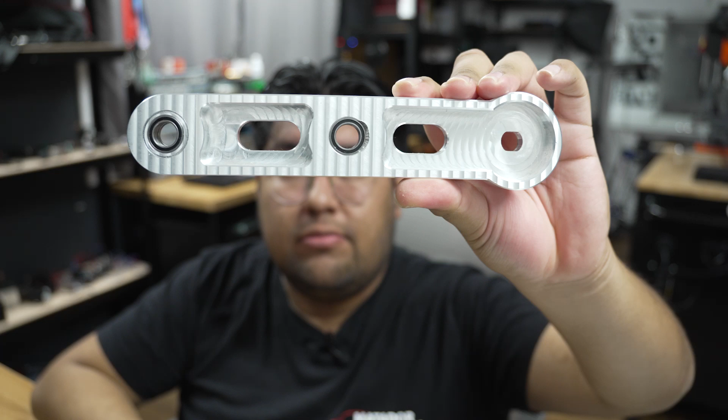This here is a part I made on my CNC mill. In this video, we will discuss everything you need to know in order to start machining your own parts.

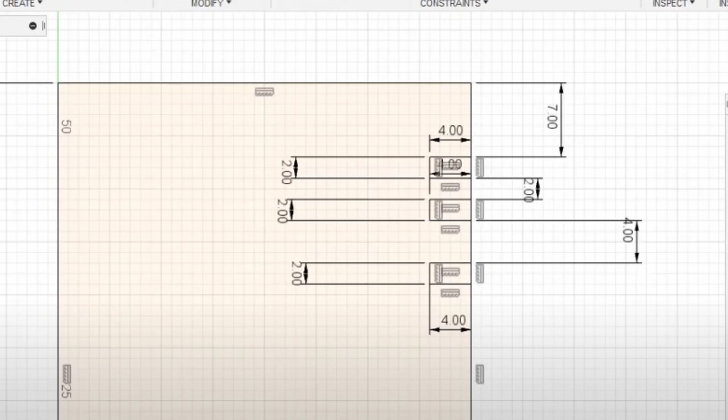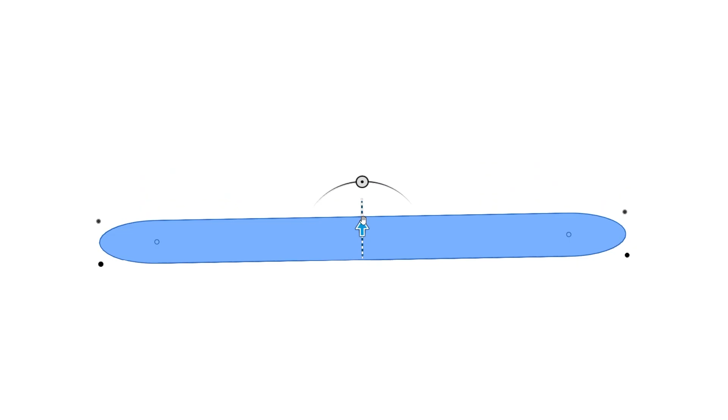Before any machining can begin, I first have to design my part, and that process typically starts in a CAD program. At its core, CAD revolves around two primary actions: extrusion and subtraction. I'll begin by sketching the basic outline of the part I want to create. Once the sketch is complete, I extrude it, transforming the 2D drawing into a 3D object. From there, I can add additional sketches on any surface and subtract material to carve out the exact shape I need.

Before you machine something, especially an assembly part, it is important to validate the design. In my case, a quick 3D printed prototype can help me gauge if my design has any apparent flaws.

Now that I know my design doesn't have any obvious flaws, it's time to start milling.

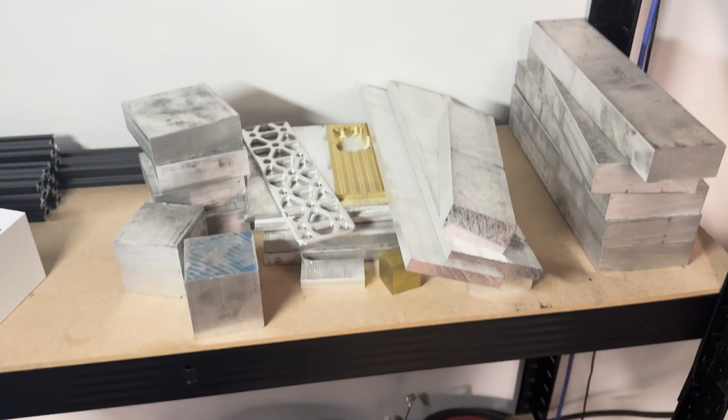In most cases, the stock material comes in either a rectangular or cylindrical shape and must always be larger than the part you're machining. Here is my stock. The nominal dimensions are 10 inches by 2 inches by 1 inch. I say nominal because when I actually measure the part, it isn't exactly those measurements. As you can see, instead of the advertised 1 inch, it's closer to 1.0125 inch.

The discrepancy between the vendor reported and actual dimensions occurs because the stock isn't manufactured to be perfect. It's just close enough. Since it's going to be machined out anyway, stock is produced quickly and cost effectively.

Okay, we now know that when we buy our stock, the dimensions might be all over the place, so why is that important? It's important because when we place our stock inside our mill, it causes things to be unaligned. And if we're programming something expecting our stock to be exactly how we have it in our CAD, that creates some issues because they don't line up. This can result in a part that is slightly crooked.

In order to solve this issue, we do something called facing. Facing is a process where we cut a slight layer off the top face, and that flat face we use as a reference.

Before I can start explaining what facing is exactly and referencing our stock, I need to first explain workholding, or more specifically, my vise. This is a vise. Essentially, it's a large, heavy, and precise clamp.

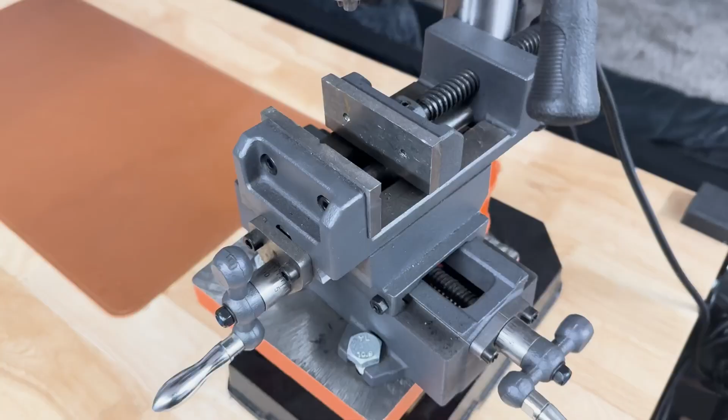Initially, I thought I could save money by using an old cheap vise I had, but quickly realized that was a bad idea. For reference, my old vise maybe cost me $60, but this one here costs around $400 to $500, which is crazy and a little annoying.

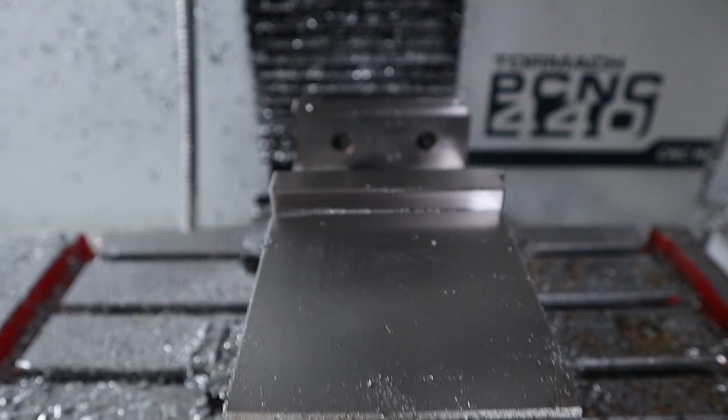A milling vise is different from a standard vise in two key ways. First, when it clamps on an object, it pushes down rather than up, ensuring the part stays securely in place. Second, a milling vise can be used to reference an axis. By this I mean that when I place a part here, I can be certain that one edge is parallel to the x-axis of my machine.

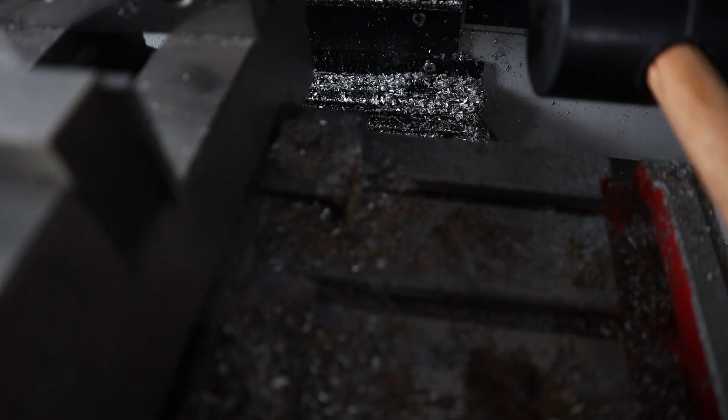To make sure the vise is perfectly aligned with the x-axis, I use these 4 clamping points. By lining things up and then using this edge finder, I can tap in the final fine-tuning of the position. Once the vise is leveled, I can secure my stock. And once I level the vise, in most cases, I don't really have to touch it for quite a while.

But if you notice something, the depth of the vise is more than my part. So when I place it inside, it just falls through. And that is an issue.

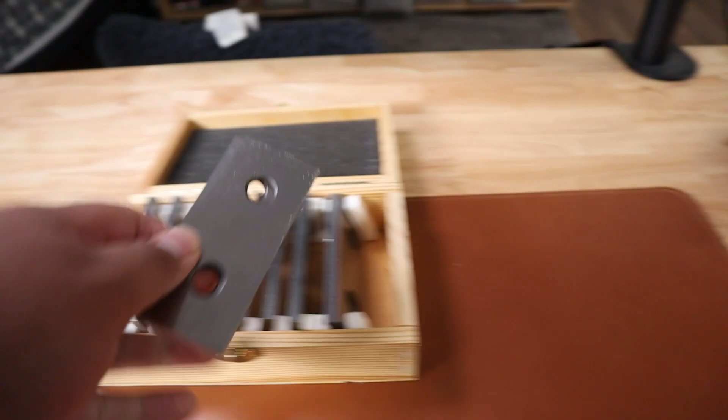To overcome this issue, we use something called parallels. Parallels are basically these thin metal pieces that we place on the sides of our vise to keep our stock offset a little. These parallels are perfectly made so that they are completely accurate and straight. This allows me to just place the stock on top. It elevates the stock to where a minimal amount of material is held down and I can cut the rest that is protruding on top.

With the vise prepared and the stock in place, we're ready to move on to the next step: tooling.

A CNC mill is powerful, but it is also not very smart. We have to manually tell it not only which tool it's using, but the exact dimensions of that tool.

For reference, I typically use 3 main types of end mills: a square end mill, a chamfer end mill, and an engraving end mill. The square end mill cuts in a straight square pattern, and it will likely be your go-to tool. The chamfer end mill, in my case, creates a 45-degree chamfered edge that makes it so I can touch the part and not get any cuts. Lastly, the engraving end mill is for making light detail markings.

There are also other options like a ball end mill, which is used for creating smooth curved surfaces. End mills vary in both diameter and length. Generally, the larger the diameter, the longer the end mill could be. Smaller diameters need shorter lengths to prevent snapping under load.

Another key consideration is the material of the end mill. High-speed steel, or HSS, end mills are the most affordable option and work well, but they need to be run at a slower speed. If you're looking for more durability and efficiency, carbide end mills are what you want. Personally, I use the uncoated ones to save costs, but there are coated variants that last longer, especially if you're running jobs continuously. The coatings help extend tool life, making them a better investment for high volume work. Since I only run occasional jobs, the uncoated ones suit me just fine.

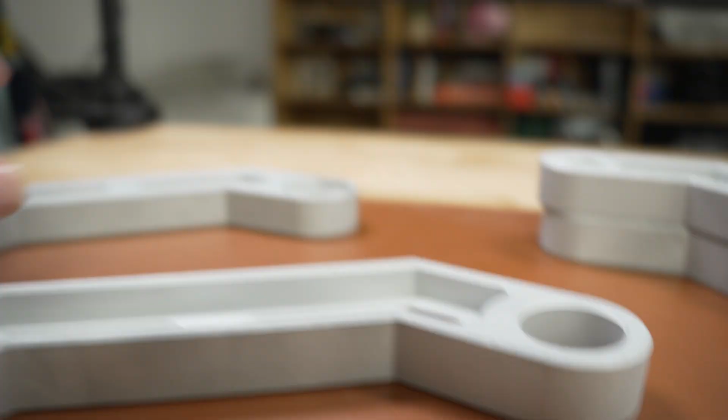Alright, now it's time to start programming the mill. While CNC milling and 3D printing both use G-code as their programming languages, the user experience is very different between the two. 3D printing is quite user-friendly. You simply import your STL model into a slicer, and in most cases you're ready to print with minimal setup. Unfortunately, CNC machines don't have the same convenience.

To program a CNC part, I need to use a process called CAM. Unlike 3D printing, which adds material layer by layer, milling removes material. With CAM, I have to manually define where and how I want the machine to cut. It's much more hands-on because every cut, every toolpath, and every parameter must be carefully planned.

There are plenty of YouTube videos for more in-depth detail, but here's a quick overview of how I program my part personally. Most of my workflow revolves around SolidWorks and Fusion 360, and I know Fusion 360 works well with Tormach, so that has been my choice of CAM software for about a year now.

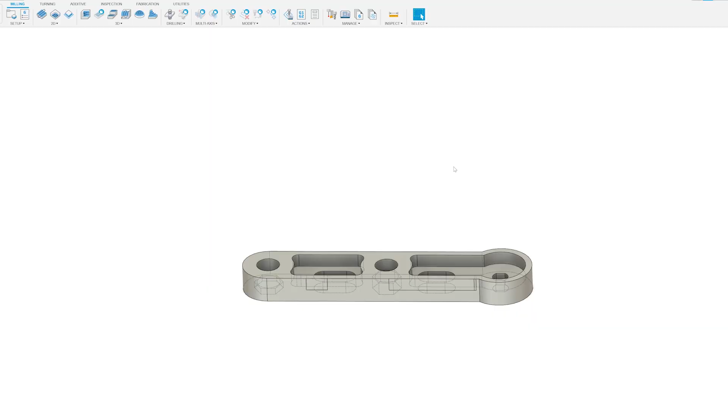So this here is the software. The first step when beginning is to make sure you are in the manufacture settings, and we start by clicking New Setup. This allows us to give the program the dimensions of our stock. In most cases, your stock will probably be around the same size as your part, since it doesn't make sense to use a huge plate to cut out small millimeter parts.

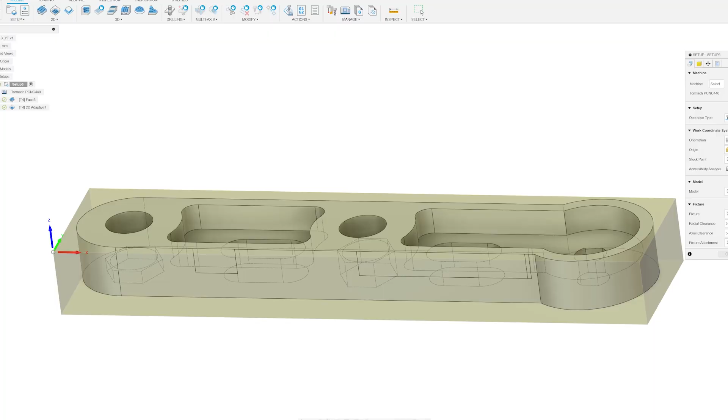The stock I will be using is this. We measured it previously, so just go ahead and do that again, and then put those values into the program. In the upper right hand corner, this page opens up, and then we click over to the stock settings. We can choose the dimensions of the box. So we'll go ahead and measure this again.

The width of it is 51.38. The thickness of it, or the height, is 25.7. And the width, or the length, is about 10 inches, but for now I'll leave it at 230.

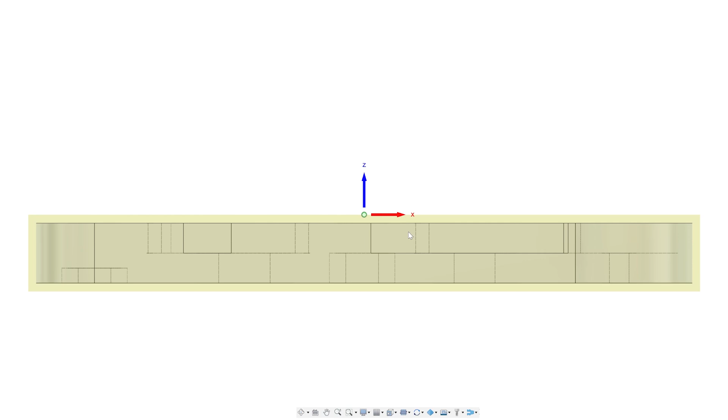The last step we need to tell the program about our stock is where in the stock our part will be located. If we look at the side profile, you can see that it is dead center on all sides. In some cases that might work, but for me, I need it to be a bit closer to the top.

So I will edit that, Z offset, and only offset about 5. The reason being is when I place this stock into the vise, I need to make sure there's enough space for the vise to grip onto. If you look closely in the video, the stock leaves about 1/8 of an inch where it needs to grab on. 1/8 of an inch is about 3 something millimeters.

Over here I have about 5 millimeters. I gave it some room since later on I need to input the measurements of my end mill, the actual part that cuts, and sometimes that measurement is off by a little bit. I do not want it to cut into my vise.

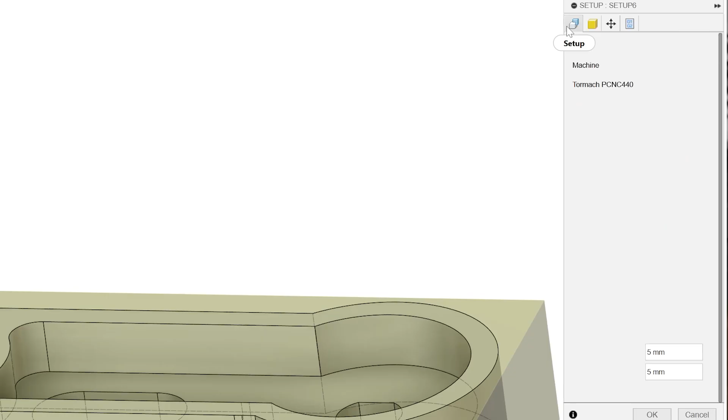With that, the final step is to tell it where the origin point is. I tend to choose the bottom left corner. The reason being is later on we need to tell the machine where the origin point is on the actual stock, and it's a lot easier to locate on a corner than somewhere in the middle where there's nothing for it to touch.

There are other settings, but for the most part, I just leave them as is. And with that, our stock is done.

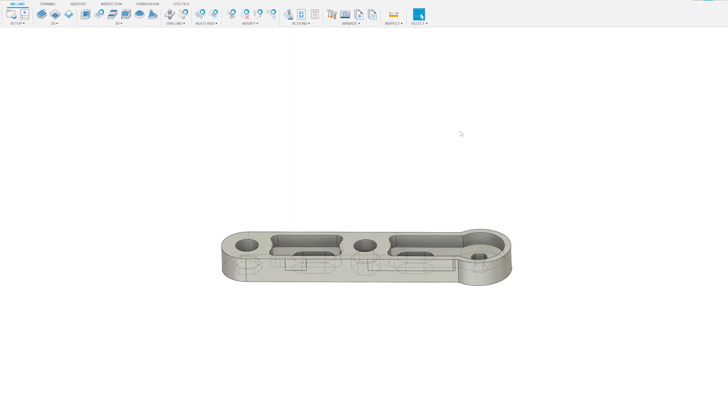Now that our stock settings are set, the next step is to start actually cutting. If we look up here, these are the options we can go through for cutting or anything else we need to do. In most cases, I stick to the 2D area, with the first step always being facing.

If you look at the stock, it's very dirty. It's a little bumpy, a little scratchy, and it's not perfect at all, right? I do not want my part having this surface on it. So in order to overcome this issue, we do facing.

Facing is the process of cutting off the first few layers of a part and making sure it's flat and even. In extreme cases, you want to do that on every side to make sure everything is aligned properly, so that when you cut it, you know for certain that everything will come out perfect. In my case, I don't need that as much, so I'll just face the top and maybe the bottom.

Once I select the option of facing, I'm again greeted with the same panel. The first thing to select is the tool. In most cases, your tool probably won't show up on here, so you'll have to input the information on your own.

In most cases, the company where you purchase your tools from will have all the information there, or it'll be on the actual package of the tool you buy. In my case, Tormach offers some options, and one of them does happen to be the tool I use.

If your tool doesn't happen to be here, there's an option to create one, and when you create one, this panel will open up. You can provide a name, and here is where you would input the information. You determine the type of end mill it is. In this case, for facing, you'll more than likely use a flat end mill.

The next parameter will be the number of flutes. This is the amount of cutting edges, so you see these twisting bits here. In most cases, for softer materials like aluminum, 2 to 3 flutes are great. For stronger materials, you would want to move up to 4 flutes. The reason being is the less flutes there are, the more brittle it is, because there's less material there. So when you're ramming it in, it might snap.

One of the options is high-speed steel, which is still a very usable material, and I use it in some of my bits. But if you want to buy an end mill and use it for a while without having to track things at first, carbide is the way to go. It's not that much more expensive and allows you to push your machine a lot faster. So when you're getting to the trial and error phase, it might not be the worst option. Anyways, at least for this end mill, carbide is the material.

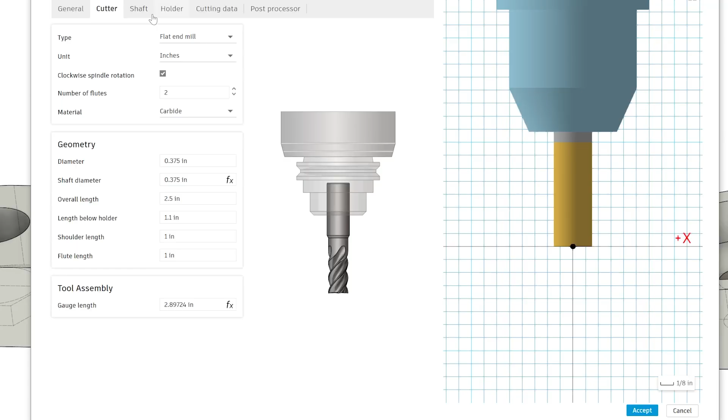The shoulder length is 1 inch, and the flute length is where it cuts. Basically, anything above this, you do not want it cutting any material, so it's about an inch. If you want to measure this, you can just use a caliper. I'm sure there are more precise tools, but for the most part that's fine. I make sure I don't cut anything over 0.9 of an inch, just in case I measure things wrong. Other than that, this is where you would input the speeds and feeds.

In most cases, when you're buying these tools, the manufacturer will provide a sheet that tells you the speeds - the horizontal and vertical speeds of the machine, and the rotation speed of the spindle. They'll tell you that depending on the material, which is a great help, but I've never been lucky. I've had to figure it out by trial and error, and even now I'm not too sure how it's determined. This is not professional advice, just someone who picked this up as a hobby and is still figuring it out in my free time.

In general, for aluminum, you want to go at higher speeds - above 7,000 RPM at least. For steel, I would go lower, but I've never really machined steel, so most of my experience has been with aluminum.

Luckily, Fusion 360 has a formula. All I do is input the spindle speed and it figures out the horizontal and vertical speeds for me. So we see here, the one they recommend for this spindle is an RPM close to 7,600. Once everything has been inputted, I accept, and now my tool's set.

Depending on your machine, you can have coolant. Basically, when the spindle is cutting metal, things heat up - the part might heat up a little over time. In most cases you don't want that, since it warps the metal, or the end mill gets hot. So you shoot it with a specific liquid called coolant. This coolant makes it so the metal does not erode and is just washed out in the end.

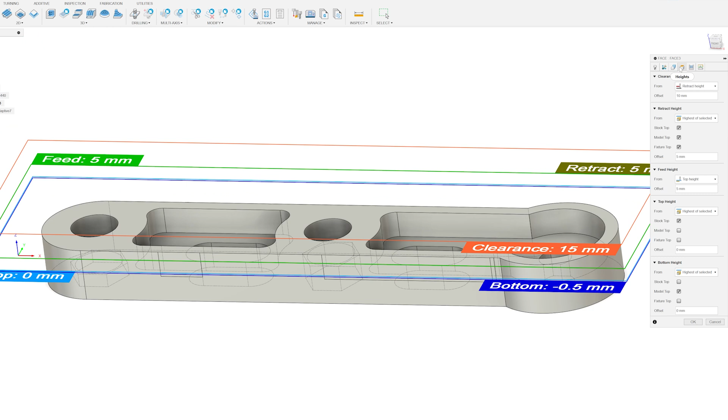Since I selected 0.5 millimeters, it only drops 0.5 millimeters, which is not that deep of a cut. But for example, if I wanted to face off 5 millimeters, I could go in one pass - for some machines that might be pushing it, so I would probably max it at 2 millimeters. It would do 3 passes: 2, 2, and then 1. For that option, you'll look at multiple depths.

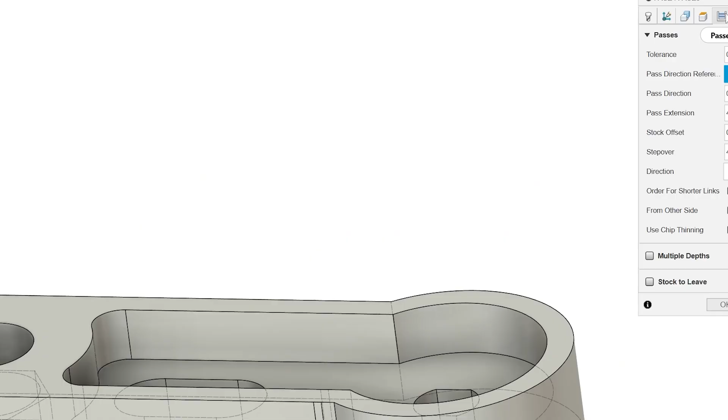I can tell it the maximum step down and which one is the finishing step - so if it should start at 1 millimeter or end at 1 millimeter. Since it's only 0.5 millimeters, I can do it in one pass. Everything else can be left as is, and that is our facing.

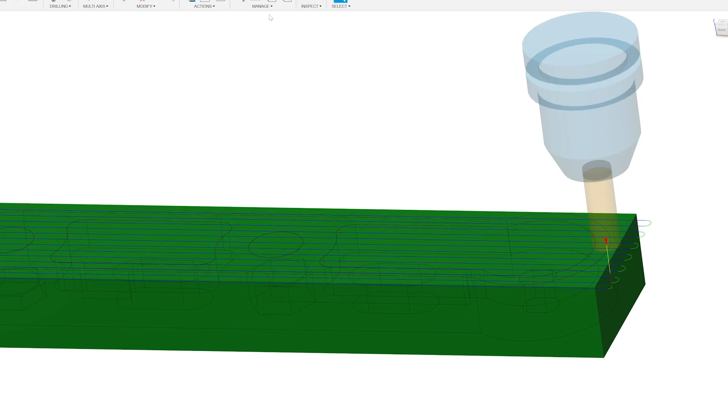Just to verify that we did everything correctly, we can simulate it. So we go into actions, simulate - this is the tool we have specified. When we run it, you can see how the part will go in. Great, looks fine to me. If you're a professional, don't judge me if I did something terribly wrong, but it should be good for now.

With the facing out of the way, the next step is to start actually cutting out the part.

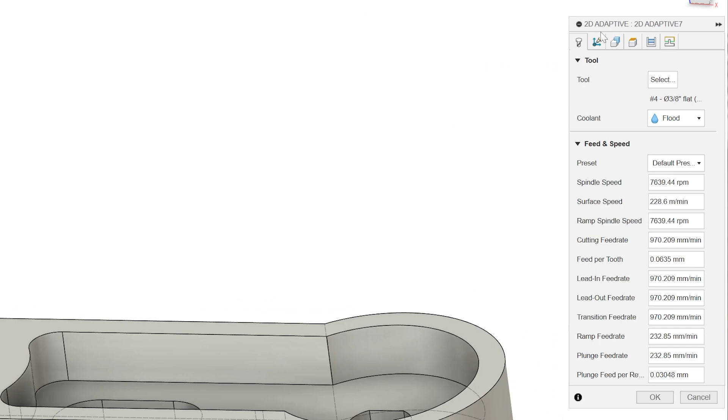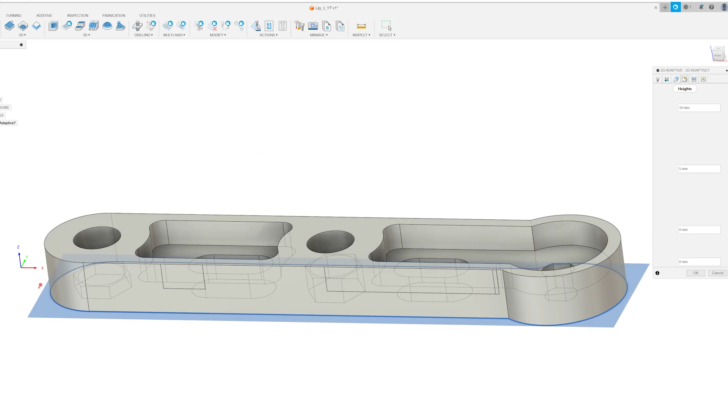The next tool I use is 2D adaptive clearing. The tool we're using will be the same one, since I do need it to travel down a certain depth. This tool is a little different from facing, since now we need to specify the part we wanted to cut. For now, let's start off with the outer bounds. If I come down here and select the bottom face or the bottom perimeter, this blue is where it will be cutting. This here tells us how the end mill will move.

It has identified the top of the stock as the top, which I guess in this case we could leave, but that's not exactly accurate, since top now is the model top. Now that we selected the bottom face for it to cut, we need to tell it how fast to cut down.

We don't want it to go in one pass, since that is a lot of friction and could break things. So we can choose multiple depths - a maximum depth of, I keep it around 2 millimeters. I can definitely push it more, but I don't want to risk things.

This is the direction. Basically, you can have it where it only cuts from right to left, or left to right, or either. There are advantages to both, but in my case, I'm not too picky. I'll leave it as is.

The optimum load is how much it cuts in, the amount it cuts in from the side. Right now it's at 3.81, which I believe would be about half its radius. Sorry, it would be about the size of its radius. I will shrink that a little bit to 3.

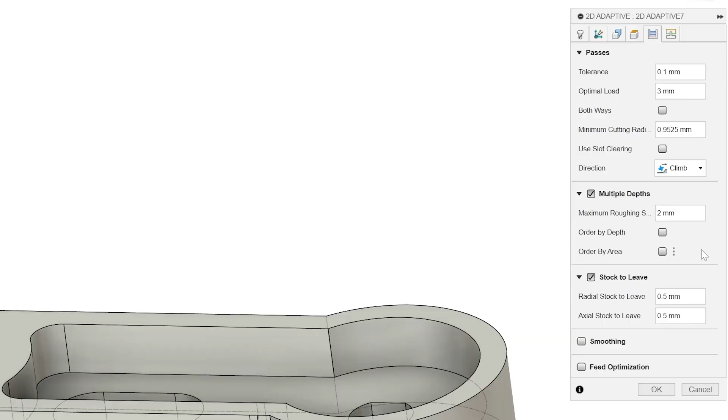And then stock to leave. Basically, if we want to do a rough pass, it just goes by quickly and cuts as much material as it wants. We can leave a perimeter to then go back and cut it slowly to leave a nice texture. For now it doesn't matter much, these parts are going to be structural and not aesthetic. There's also lead-ins, ramping, and other settings you can experiment with, but in this case things should be fine.

So once I click OK, it'll do the calculations, and now we go back to the simulation.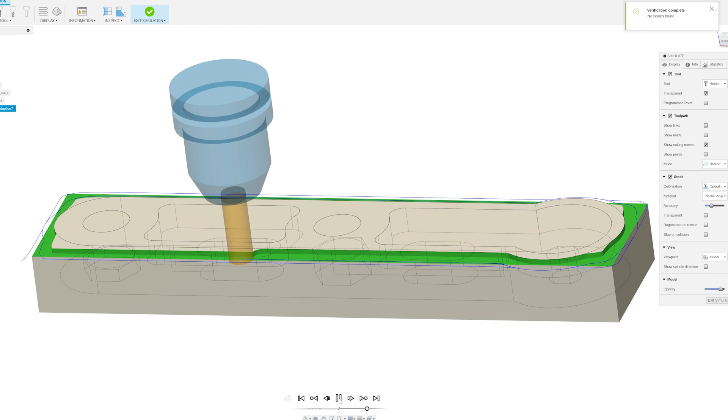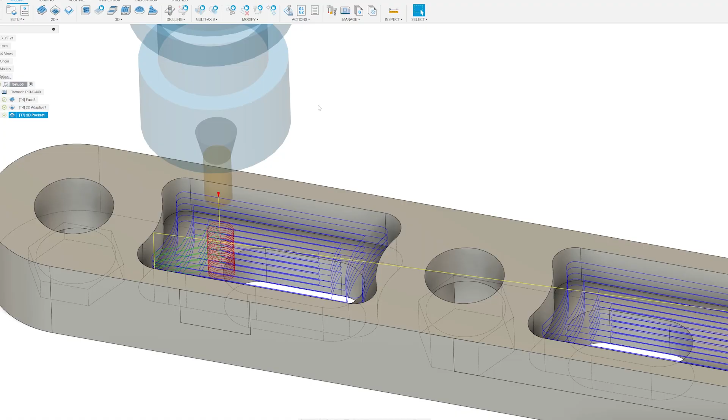All right, now that the outer perimeter has been cut, the next step is to follow a similar process for the internals. You'll see it start creating a helical pattern before it plunges in. This offloads some stress and makes sure we keep things well maintained.

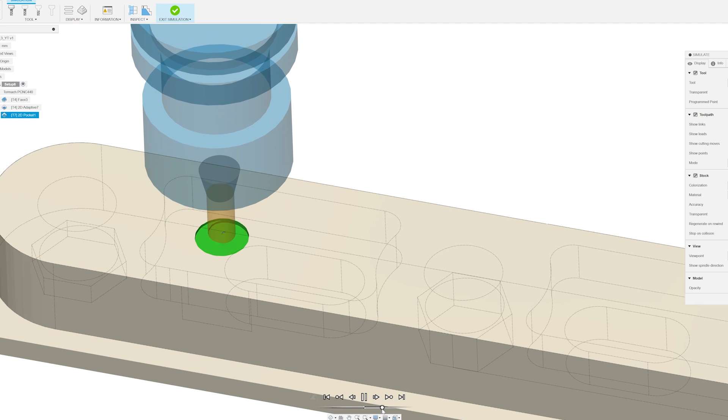Okay, that is the basic idea. I could elaborate further, but covering every single point of this would take an astronomical amount of time. You're probably better off looking through other videos, right? Hopefully this video can provide you with some terminology and aspects to look into.

Now that I've explained some aspects of it, there's a lot of repetition, right? The same process goes through with holes. So come back in a bit after the parts are done.

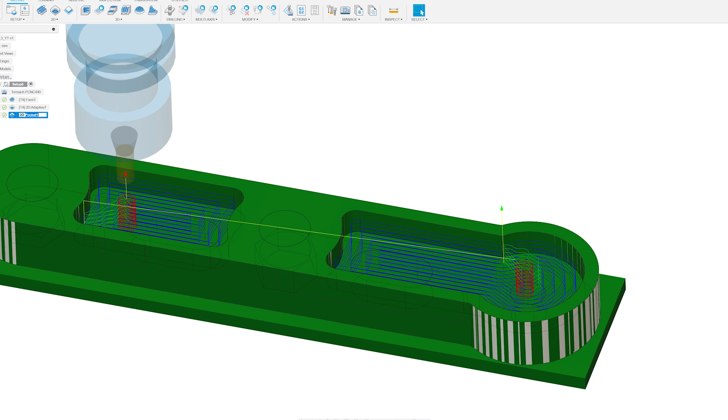Okay, I went through and finished the part - the inner pockets, the outer cutting. Went back in to clean my pockets since they weren't perfect. Milled out the holes and milled out those as well.

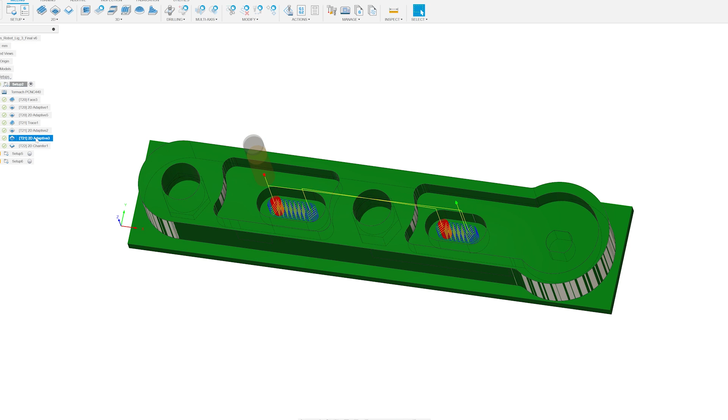The one new step is the chamfer. This is an option up here as well, where all I do is select the edges of where I want it to be cut, then select the proper tool. In this case, it's a 1/4 inch 45-degree chamfer.

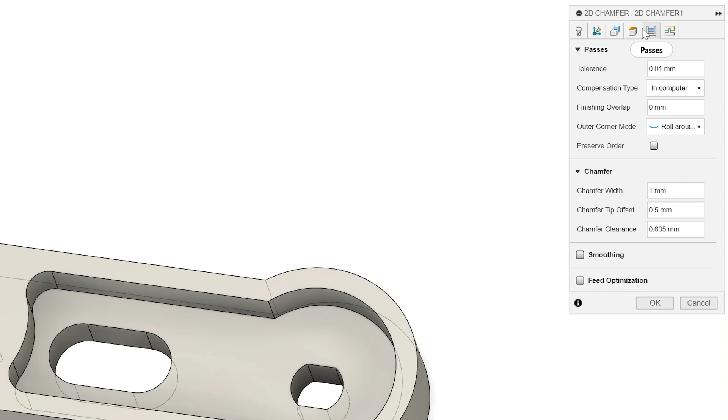And the only setting I really changed came to here: chamfer width 1 millimeter, chamfer tip offset.

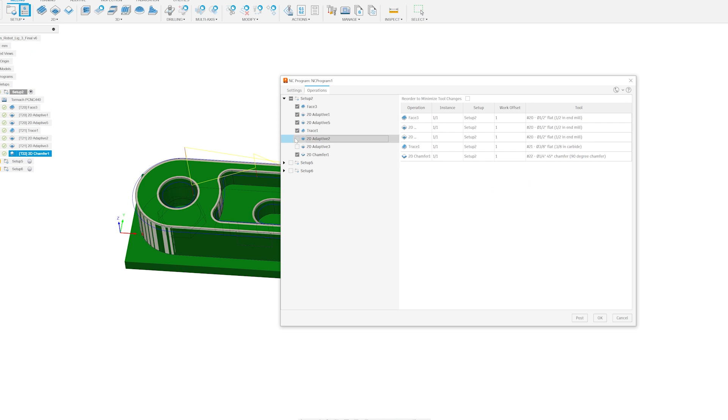Now that I have my part programmed, the next step would be to export it. To export it, it's similar - it's up here in the setup section. Create an NC program, right? We make sure we select the proper options. In this case, I want everything selected in my Setup2.

Other than that, we specify a post. This basically tells us the language the machine runs or how it's set up. In this case, it's in Tormach. I designate the name - part. You can just call it YouTube part for now.

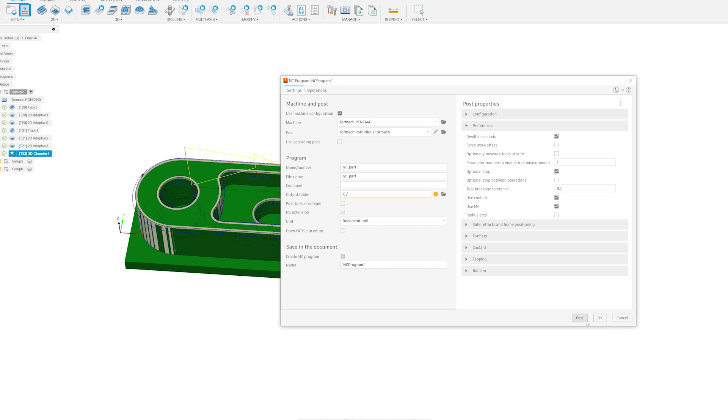So it's an output folder, and in my case I put it onto a USB drive. I upload it to my Tormach behind me, making sure I export as an NC program. And I click post - it should show on my desktop or flash drive, and it's ready to be uploaded to the machine.

With the program on my flash drive, it's now time to head over to the machine. In my case, I'll be demoing all this on my Tormach 440. But depending on what machine you have, things will differ, be it either a Haas mill or a 3D printed one.

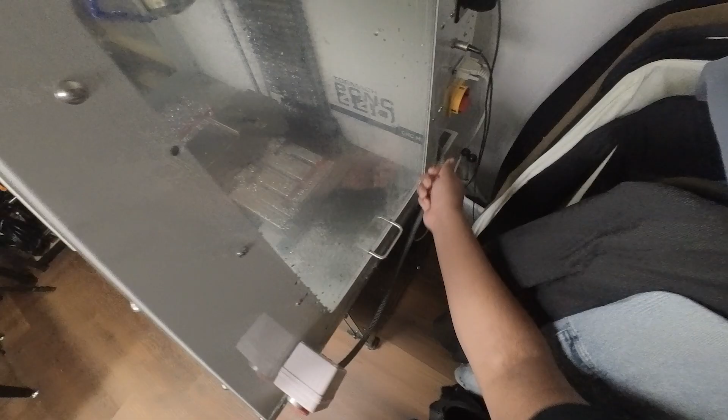Here on the right side is the power switch, and here is the e-stop. Basically, this is a button you press whenever something's about to go wrong. Now I clear the console.

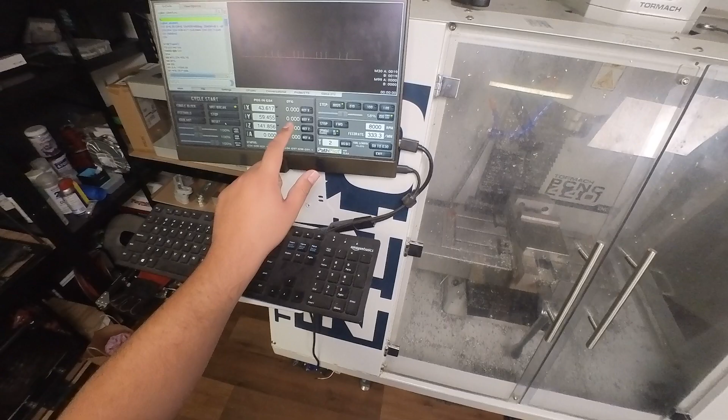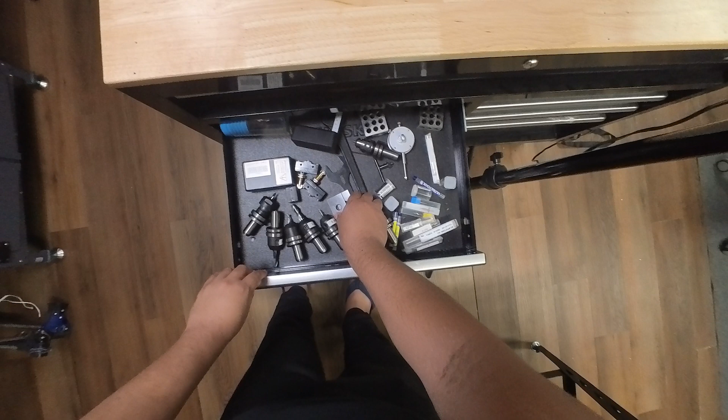The next step would be to reference my axis. We do this because the machine needs to know where it's located in 3D space, and this allows it to do that. Right here are the parallels I'll be using - these will leave me about 1/8 of an inch to grab onto my stock. And I'll be grabbing my first end mill, which will be a 3/8 inch, 1 inch long carbide end mill.

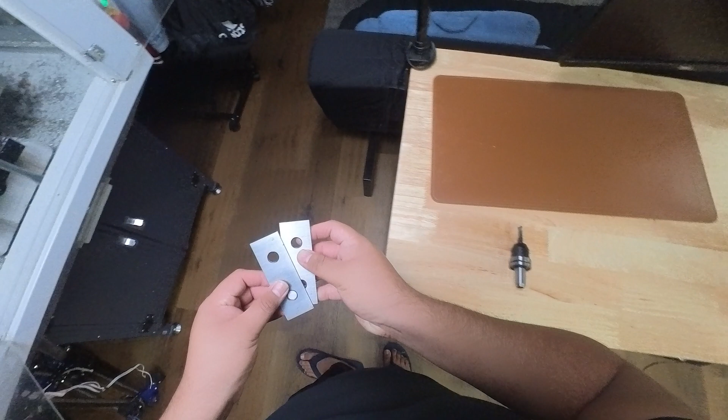We're placing them to the sides, making sure they're clean and there's no material on there, or else that will mess up the alignment.

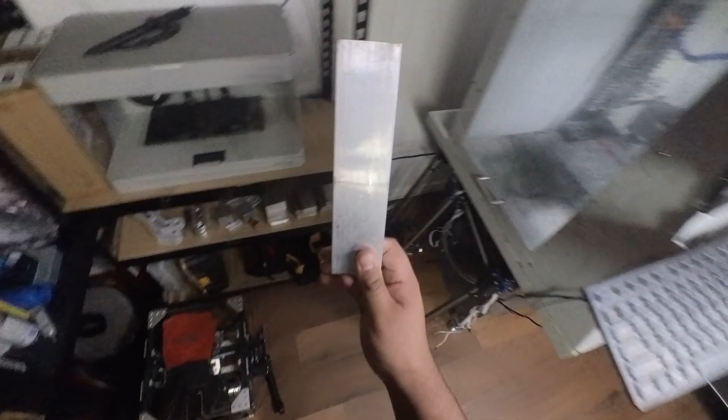The stock I've chosen is about 2 inches by 1 inch by 9 inches. This is close to the max the machine can do when it comes to the max length of 10 inches on the x-axis. I place it in my vise and make sure it's securely inside.

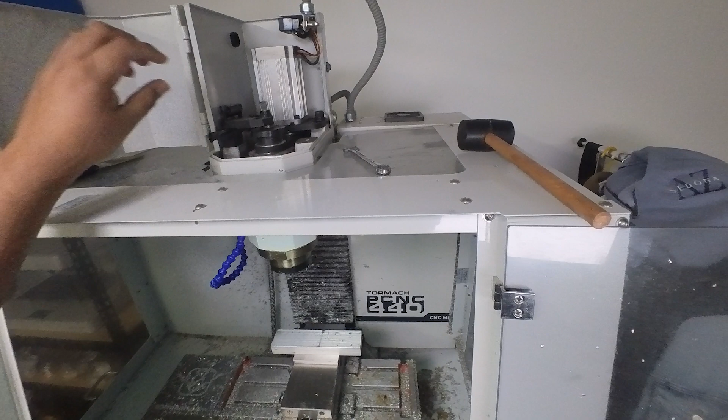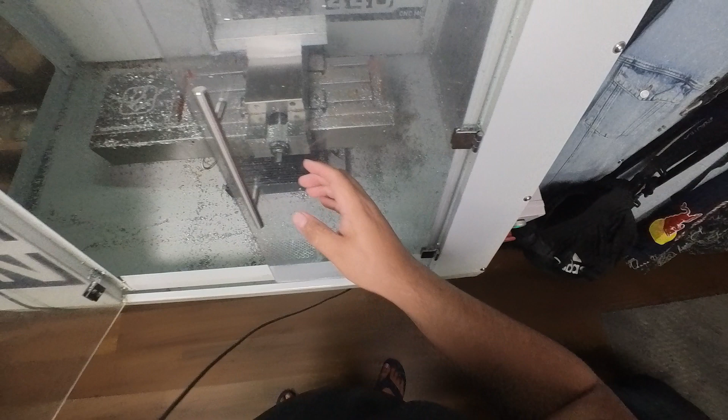The next step is to start locating my origin point. This is done by using an automatic probe. Most mills have something like this. It might look different, it might have different features, but the basic idea is to use it as a locator. The bottom tip of it is a sensor, and it'll return a value whenever it hits something.

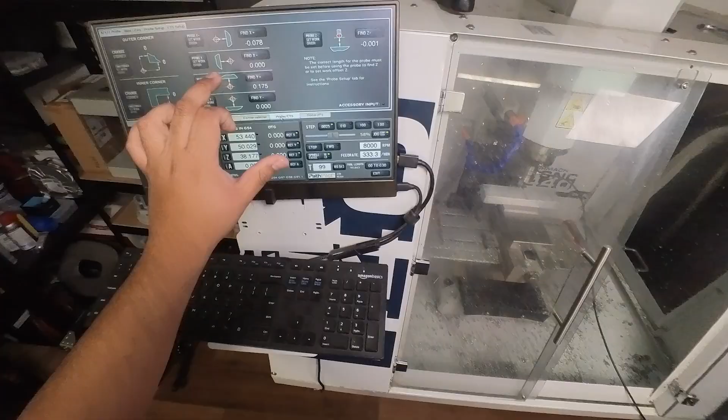In my case, if I want to locate the upper Z height, I will position it about 1 inch or 1/2 inch off the top face in the middle. It will slowly go down until it touches something, and it'll return back to me the value and save it.

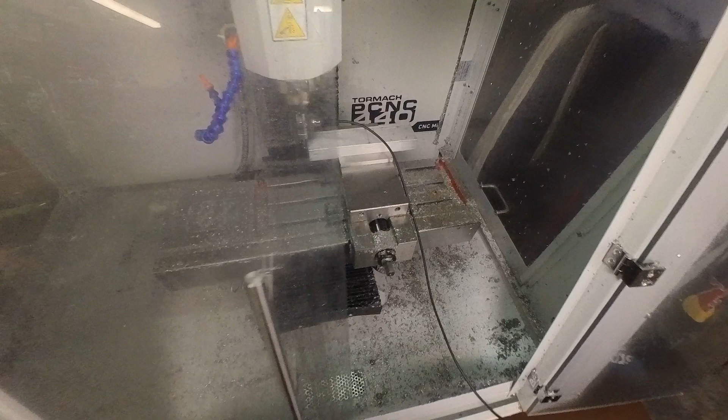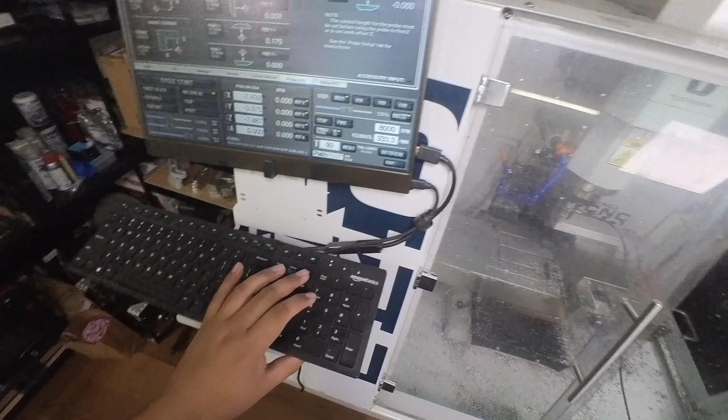A similar process is done with the most left side and most closest side. The panel is pretty self-explanatory. It has images for all this, and once the button's pressed, it'll automatically find you the top or find you the corner and return the value.

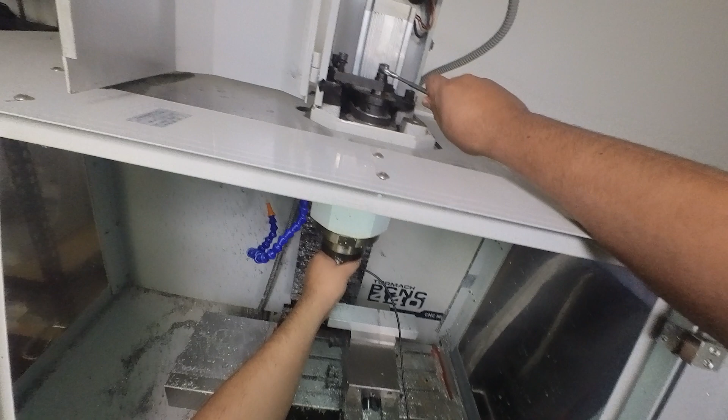In some cases, you might not have a sharp corner left, so there are options for finding inner corners or even the location of a center hole. I've used this before. You have located your starting point.

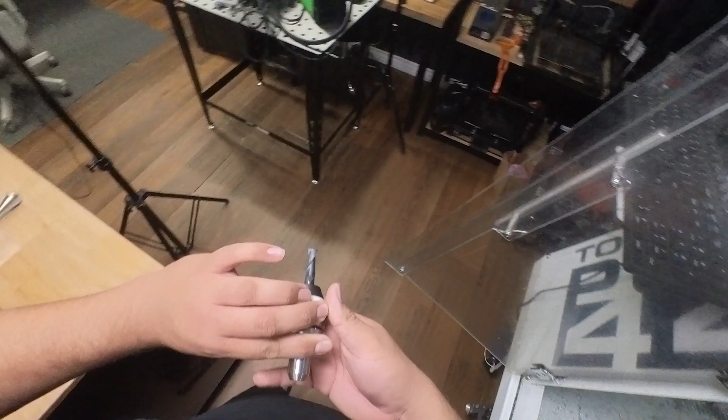The next step is to insert a proper tool. For Tormach, at least, the process looks about inserting the tool with one hand and holding the top with the other, tightening it to make sure that the tool will not fall out when in use.

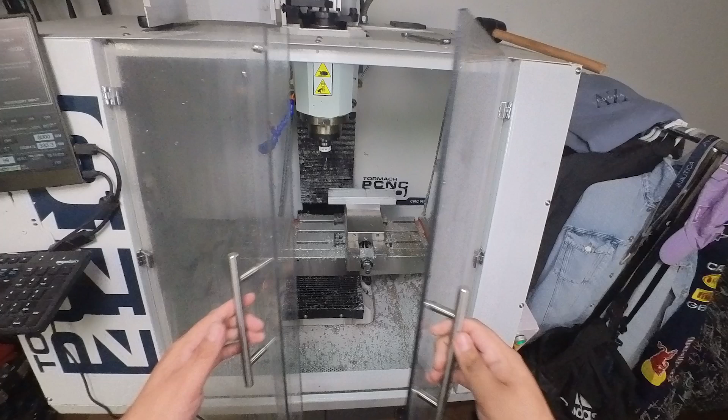Before starting up your machine, you might want to make sure that the area is clean, make sure it's not going to hit anything. You want to make sure that there is enough oil in the machine, just like any other proper tool.

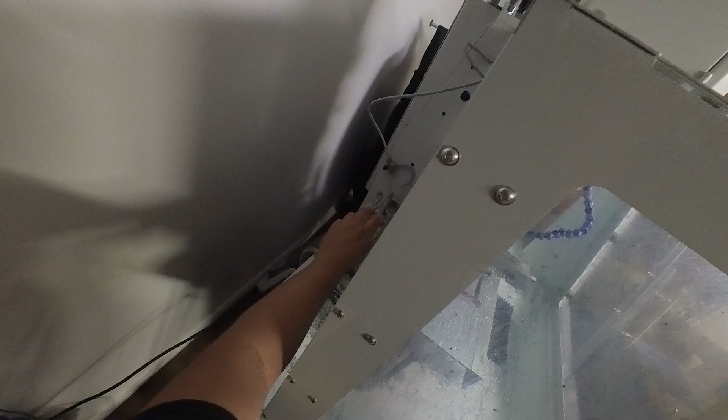You will want to make sure the coolant nozzle is in the right direction. I've forgotten about this and splashed it all over the back wall of my room.

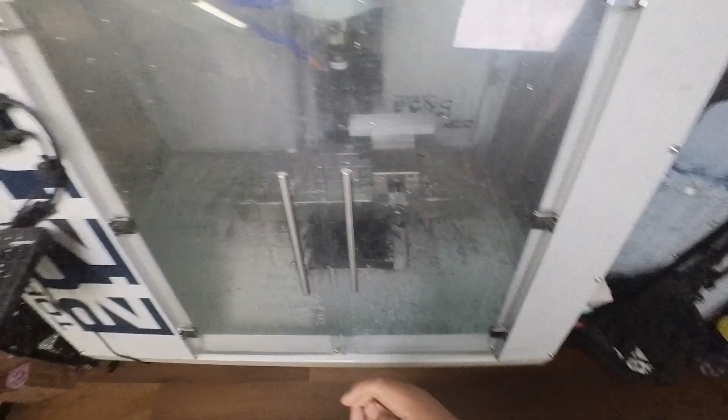The next step is to load the G-code. You go to the location of your flash drive, you load the file onto the actual machine, and then you load it into the console.

When open, it'll show you a brief preview of what part you are milling. Make sure it's the correct one, and make sure the origin point is in the same location that you have set. You will want to double check the tools.

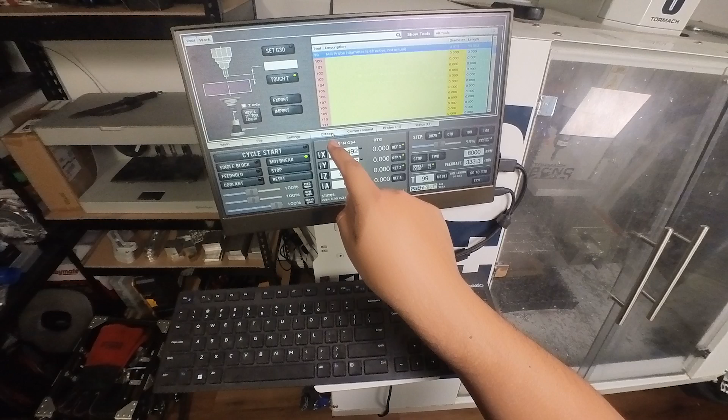It'll give you a list of tool numbers. Make sure the tool heights are inserted. And with that, you can cycle start.

The machine is not programmed to detect errors. You will have to do that yourself. You'll have to get accustomed to listening to it and making sure it sounds proper, and also pay attention to it from time to time to make sure things are good.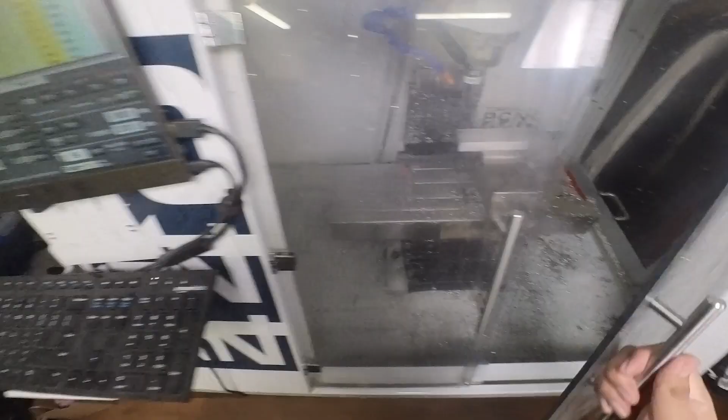If you're wondering how you handle tool changing, the machine should stop on its own and give you time to change it. It'll just stop and won't continue until you press start again. From then on, you do a similar process: take out the tool, put in a new tool, hit go.

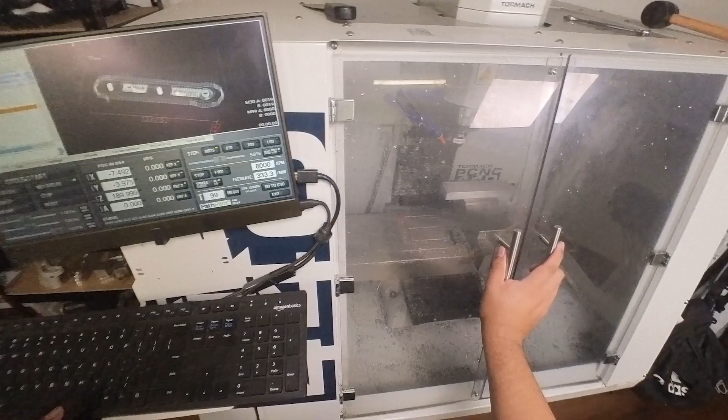And since you set the origin point, everything's already calibrated in. All that is left to do is just watch and see it cut.

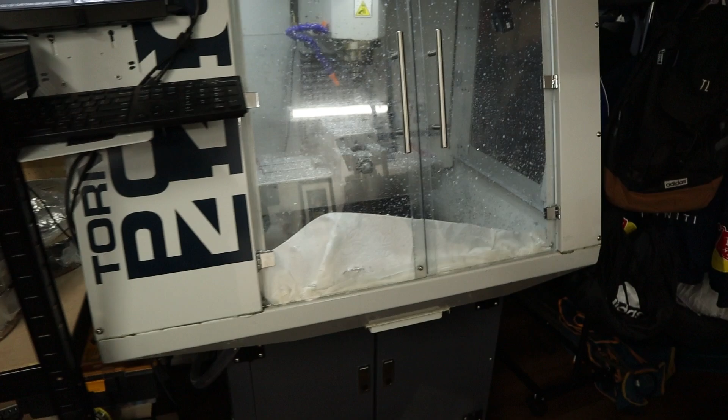Like 8 or 9 o'clock, so hopefully no one gets mad at the sound.

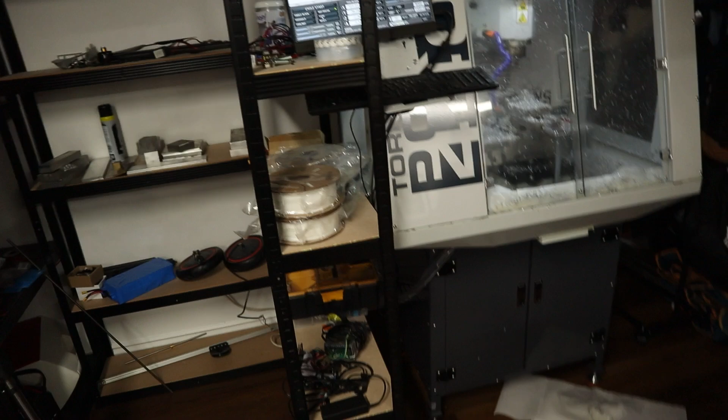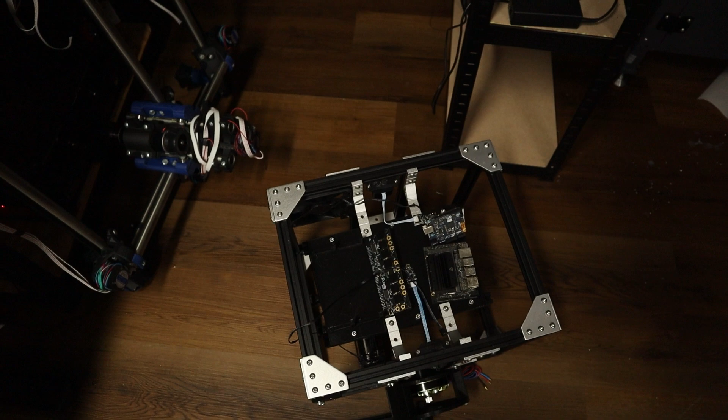Okay, so some bad news. Well, actually, first some good news. Machined out a part, finally getting back to work on this piece of... Some bad news though, if you look here, it's messed up.

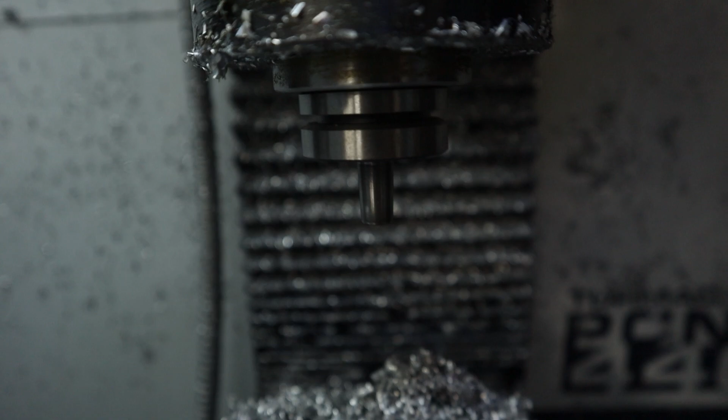What happened was one of the drill bits I was using, or sorry, the TTS holder, whatever it's called, came undone. It seems that this piece is not suitable. This is not the first time this has happened either, which is a bummer.

After hours of programming my part and more hours of watching it machine and having to make sure everything's fine, I finally got my part. I tested it on my robot, it fit, and there are some blemishes, and I definitely could have made it better, but it's perfect for what I need.

When I machined the part, the top area was done.

But I was still left with the bottom perimeter. In order to get rid of that, I had to take it out of the vise, flip it upside down, and clamp onto these bottom edges.

From then on, I did a facing operation where I just kept going until the top layer was gone. And once I was left with this flat area, I could locate with one of the holes and then create programming to add in the chamfer and add in any other holes that I was missing.

So with my part done, the next major question to ask is if it was worth it, right? This was only one part out of probably the 20 parts I need on my robot. And so if this part took me, say, 8 hours, is it worth to spend, what would that be, 160 hours on everything? And the question is a bit complicated, right?